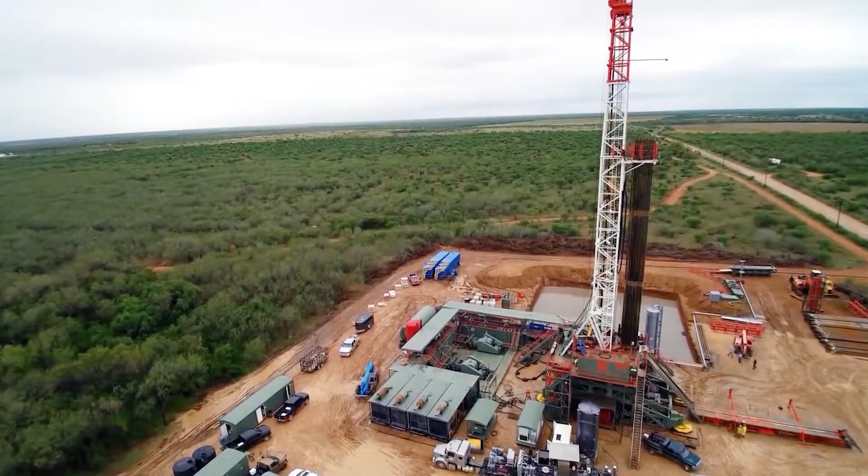Imagine a world where you no longer needed to go out to the field to give yourself a starting point for creating a schematic or trying to figure out how assets connect in your system. A world where you don't need to struggle anymore sending system revisions back and forth over emails between your field staff and the drafters.

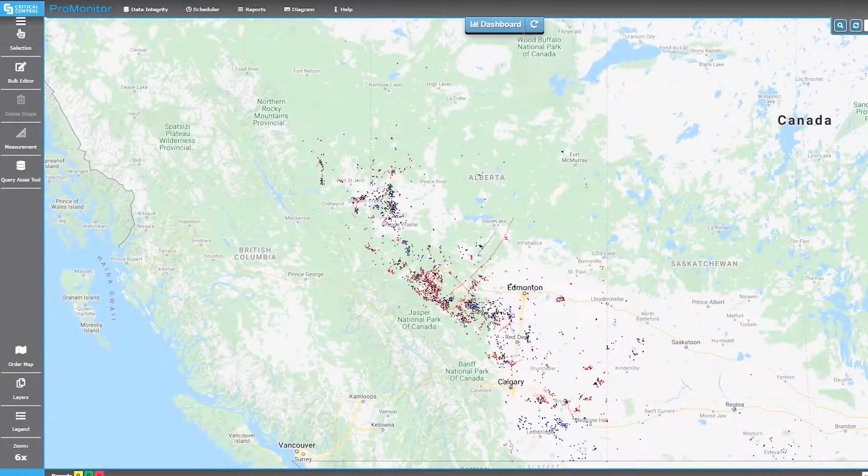Imagine a world where you're able to visualize all your assets on a Google map, overlaid onto satellite imagery, showing how your assets are connected from wellhead to sales, and then being able to dive further down into a measurement schematic. All of this through the cloud using a desktop, laptop, or mobile device.

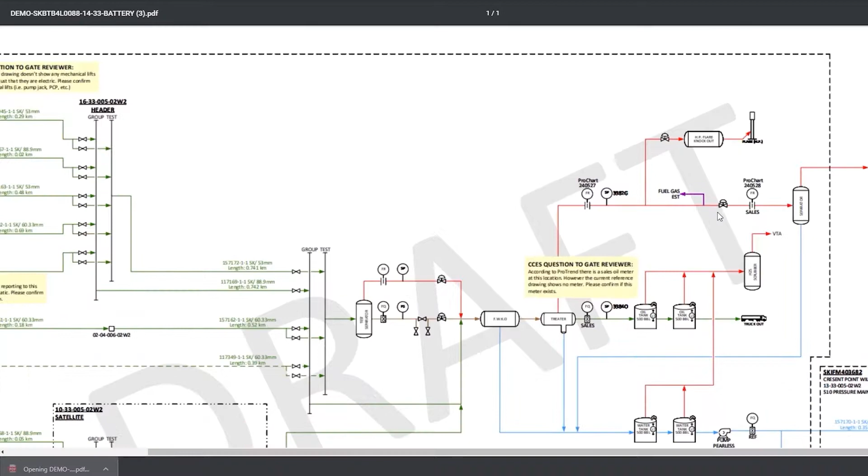Imagine a world where we make it easy for you to build your drawings and make it even easier to make updates. Imagine looking at a PDF drawing and all the shapes in that drawing are saved as data sets, allowing you to compare this data to other internal and available public data sets, focusing only on the anomalies and allowing for quick and easy management of change process.

ProMonitor Schematics is quick and cost-effective to implement, being the leading industry standard in measurement schematics. And this software makes it much easier to track and report on allocations over multiple lease locations.

ProMonitor is a web-based, fully hosted platform that you can access on any web browser. The same access portal is used for all different ProMonitor subscriptions, including Schematics, Integrity, Scheduler, Vessel Management, and ProMonitor Live.

So how do we make it that easy to create your draft schematic? To start, we load all the private and public data for wells, pipelines, and facilities that you either operate or license into the ProMonitor GIS platform, allowing you to visualize all your assets on a Google map.

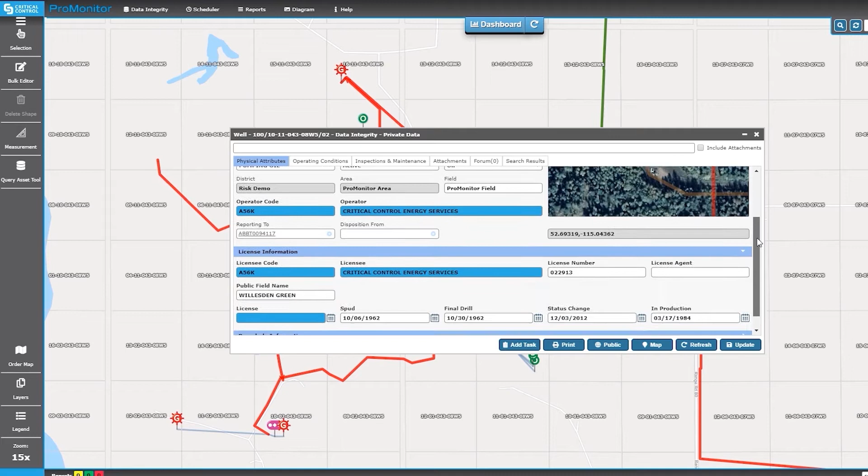ProMonitor receives constant public data updates and refreshes the dataset every 2 weeks. This allows for assets acquired or divested, attribute changes on wells and facilities, such as status changes, to be automatically captured and updated.

Using data analytics and internal measurement knowledge, we connect all your assets from wellhead to sales, giving us the physical flow for the schematic. If you're a subscriber to ProMonitor Integrity, you're able to leverage from this connectivity or vice versa.

We then add all the necessary measurement points: storage tanks and vessels, fuel, flare, and vent takeoff points, facility delineation, production and processing equipment, piping, transportation, and any other necessary information as outlined by the regulators to this schematic.

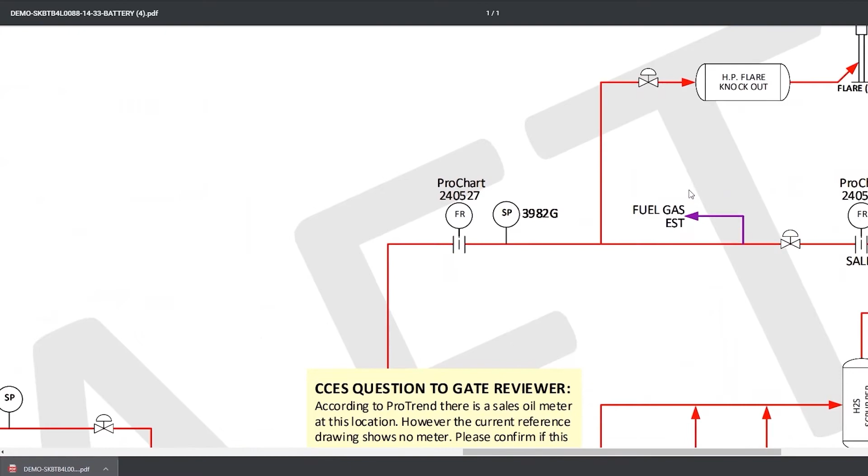If you're a subscriber to ProTrend, the industry standard in fluid composition management, we will add all the validated sample points to the schematic, along with any ProChart or ProMonitor Live connected meters you might have as well.

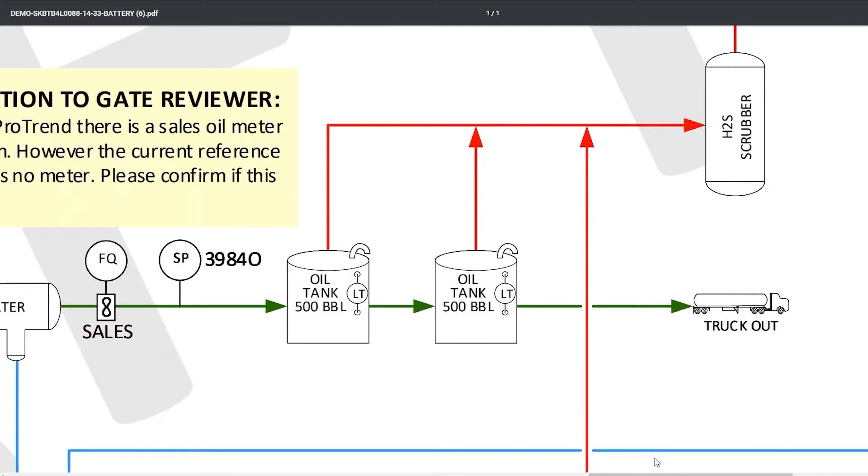Each shape you see on the schematic has a myriad of data behind it, and it is saved as data sets. Our unique tools and algorithms then run quality checks on the data accuracy, leaving notes on the drawings to be verified. All the first draft schematics will then be housed in ProMonitor, where your team can then validate the drawings.

So what does this schematic product look like? Our central repository version control and workflow process ensure that all stakeholders inside your organization are only dealing with the approved drawings and the latest versions.

ProMonitor subscriptions come with unlimited users, and each user can be configured to allow for different levels of access. Users can access drawings at any given time through the cloud using a desktop, laptop, or mobile device.

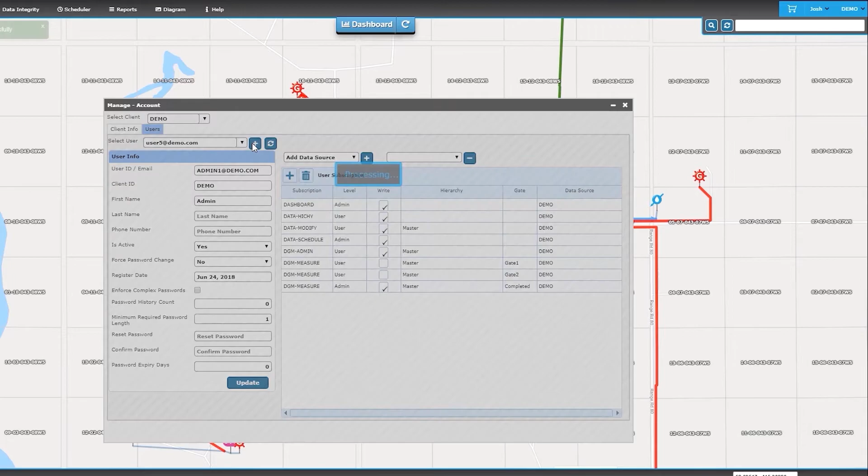Every drawing goes through a gated review process and has an audit trail for every version of the drawing from start to finish. ProMonitor provides multiple options for reviewing drawings, making the redline process easy and comfortable for your team.

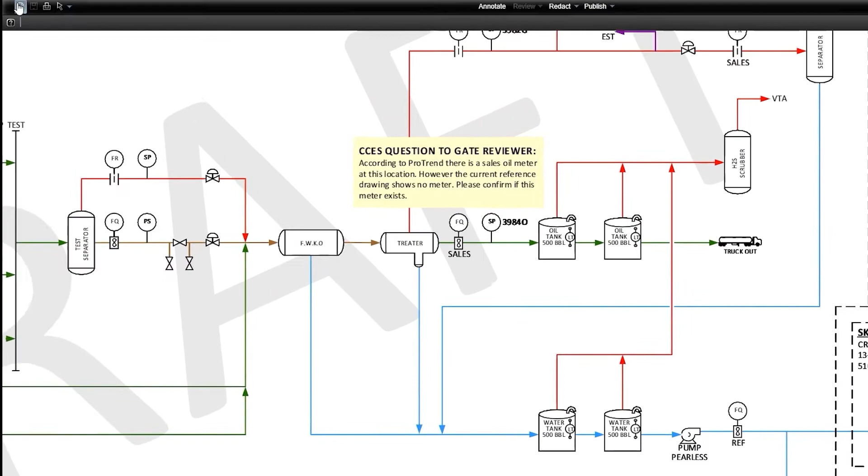Over the years, we've been really fortunate to work with some of the best measurement people in the industry who have helped us enhance our processes and our product. All our templates, stencils, and processes were designed with these regulations in mind.

By subscribing to ProMonitor Schematics, not only will you meet local regulatory requirements, but you can run asset inventory reports and cross-reference with your production accounting and field data capture systems.

And our schematic software can support allocations requirements by tracking and reporting on all production all the way back to the well site. ProMonitor has extensive reporting that users can run anytime, giving your team peace of mind in the event of an audit.

So now that the schematics are completed, how does the management of change process work? Keeping measurement schematics up to date can seem like a never-ending task. While with ProMonitor Schematics, we take care of it for you.

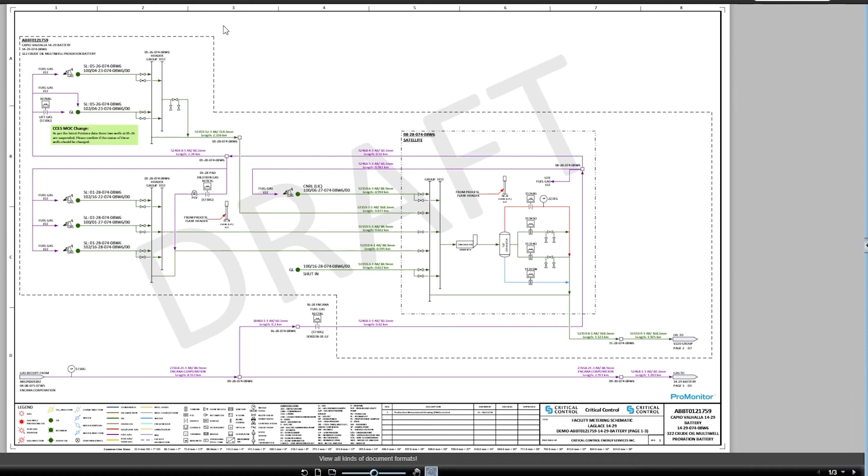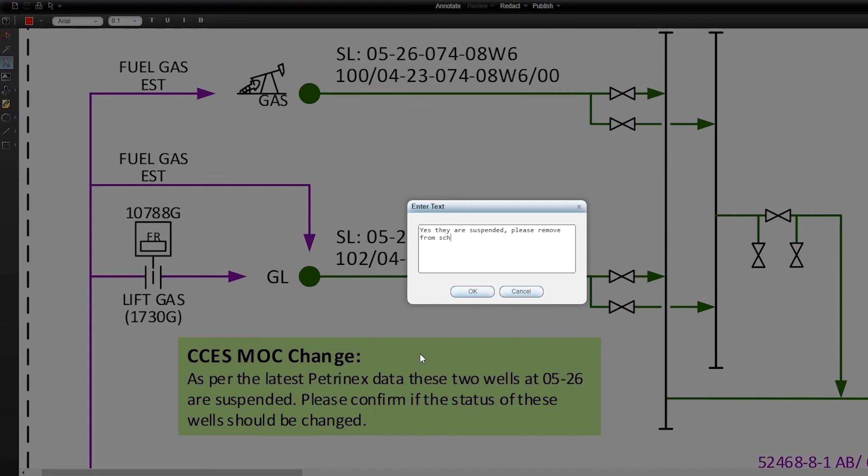Using ProMonitor Schematics Drawing Schedule tool, we cross-reference all your data to other internal and available public data sets and let you know where mismatches or possible updates are needed. ProMonitor sends out monthly MOC reports to be verified by your team, making the management of change process easy and keeping drawings up to date.

The pricing model for ProMonitor Schematics is simple. We are not a drafting shop, and we don't believe in that pricing model either. Implementation fees are a flat fee based on the complexity of your facilities, along with a monthly subscription based on the number of facilities in the schematics, so no hourly billing.